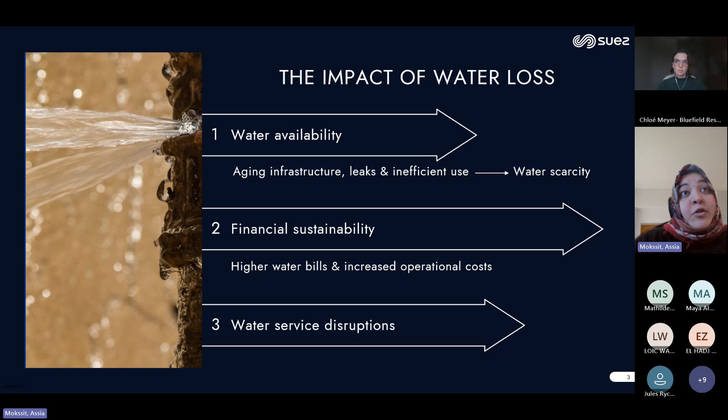So talking about water loss, it's a critical issue that can have significant impacts on water availability and financial sustainability. Excessive water loss, which is often due to aging infrastructure, leaks, and inefficient use, can lead to water scarcity, which impacts consumers. This, in turn, can result in higher water bills, increased operational costs for utilities, and potential water service disruptions. And even further, it can make a network switch to what we call intermittent water supply, which is very hard to come back from once it's established.

And saving only half of this minimal consideration would amount to 200 million more people that could be supplied without draining resources, equivalent to basically 25 times the population of New York. So this is the global idea, but the truth is, when we talk about non-revenue water, this figure entails real physical losses, so real amounts of water that are lost, but also what we call apparent or commercial losses, which are more related to losses in income.

But even though apparent and commercial losses are not directly related to amounts of water, reducing them is crucial to allow the utility to keep its sustainable financial capacities. This means that they would be able to invest in all the actions that are needed to reduce the physical water losses. So when we talk about non-revenue water, we must take into account physical losses as well as apparent losses.

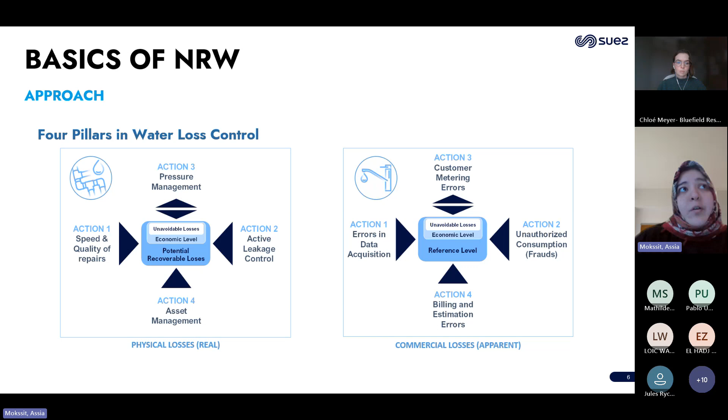This slide shows the global approach that we use in SUEZ, but it's basically the traditional one that everyone uses. There is first an assessment step, allowing for the definition of the optimal combination of actions according to the existing level of efficiency in the system. Then at the bottom half of the slide, we have the actions that are carried out, as we saw them in the previous slide.

These actions cover first leakage management, which entails leakage mapping, detection, and repair to enable a quick response and reduce leakage runtime. We also have pressure solutions, which include advanced pressure control to minimize stress, leak frequency, and leak flow. Then we have asset solutions, allowing to identify weak assets to reduce break or burst frequency and maximize capital expenditures or investments. And finally, there are revenue solutions, which consist in identifying, detecting, and reducing uncontrolled and non-revenue volumes to increase revenue and allow the utility, as we said earlier, to maintain financial stability.

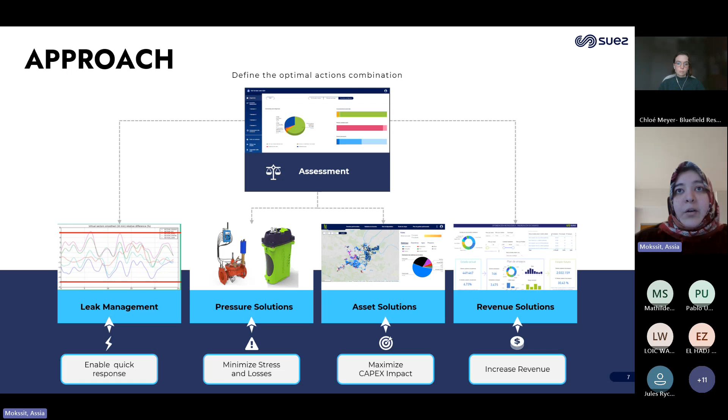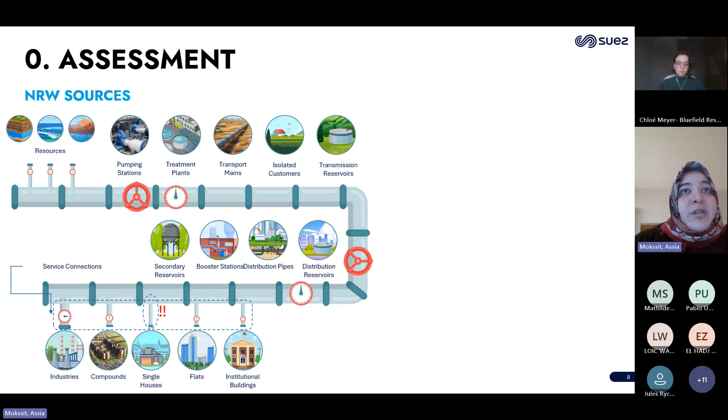So what we will see in the next slides are the details of each of the steps that are related to reducing physical losses. So here, the first thing is the assessment part. And in order to do that, we review this figure, which represents the common elements in a water system to identify the different sources of NRW.

So as you can see, at the production or transport network, we can have metering inaccuracies at the source, leaks or overflows at the reservoir level, or losses on the mains. Then when it comes to the distribution network, we can have overflows or leaks at the tank level, but also leaks on the pipes, the service connections, and the accessories. And finally, at the customer level, we find the main constituents of apparent losses.

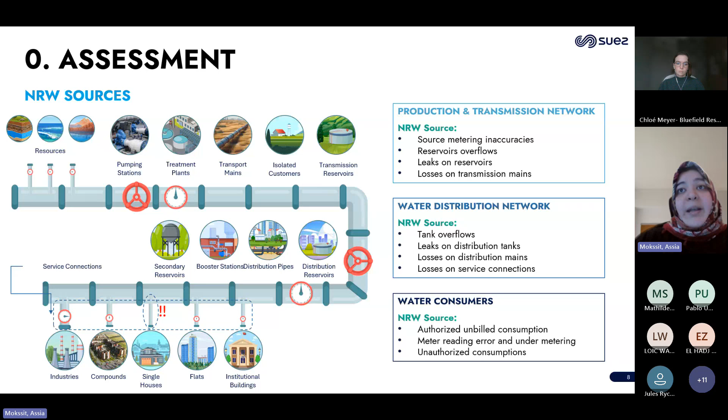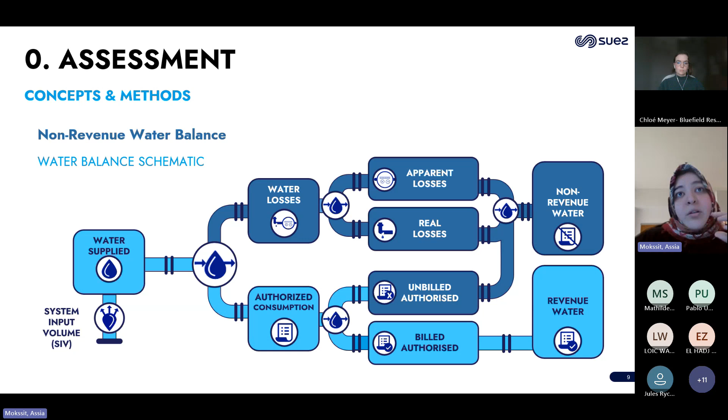So the assessment step here needs to explore each of these potential sources and evaluate the losses related to them, which actually allow us to draw a water balance schematic. So this is what you see here on the slide. Here you can see that the system input volume, so basically what we put in our system in terms of amounts of water, is divided into authorized consumption and water losses. And the NRW encompasses the unbilled authorized part of the authorized consumption as well. So when acting upon reducing NRW, it's the dark blue part, basically, of the figure that we're trying to reduce.

And this figure comes actually from the IWA's water balance, which allows us to detail the components of our system input volume. And this operation is crucial to conduct an assessment and have an idea of the system's current efficiency. And in order to do that, we have three main methodologies. So we can carry out either a top-down analysis, which is an analysis of real and apparent losses based on volumes from production data and consumption.

Then the second one is the bottom-up analysis, which goes from the estimation of physical losses from parameters like the minimum night flow or pressures. And then the third one is called component analysis, and it is based on the estimation of each component, like leaks, pressure data, and meter errors, and it's developed using operational data. And ideally, an assessment would entail using at least two of these methods to complement the data and evaluate the NRW level of the system.

So the assessment actually needs to gather operational, structural, hydraulic, and customer management data to come up with an evaluation of the current NRW level. This can be done using different tools. So the IWA Water Loss Specialist Group has a free tool called EasyCalc. At SUEZ, we use a tool called AquaCircle. But an important thing to keep in mind is the fact that it's not just gathering figures and filling out basically boxes in the tools that needs to be done. This assessment step needs experts going on the field to gather this data firsthand and assess the situation.

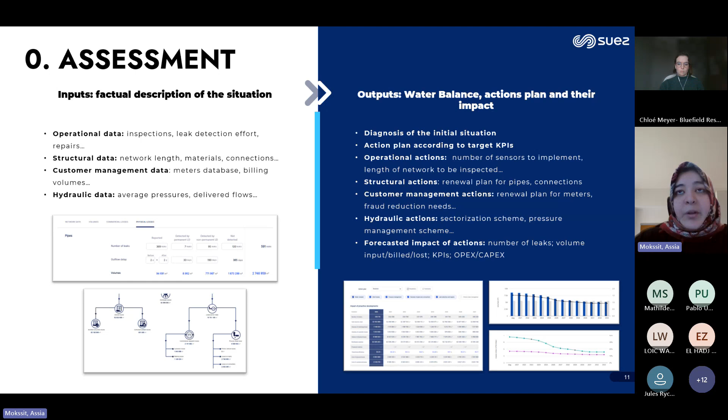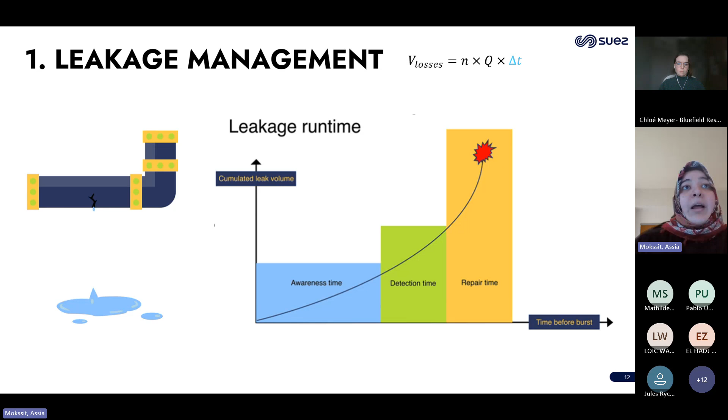And an easy way to look at it, if you look at the top of the slide, it's by dividing the losses volume or quantity into its components. So if you look at the equation, to reduce the volume of losses, we can either reduce the number of leaks, we can reduce the flow of the leakage, or the leakage runtime. And when it comes to leakage management, what we try to do is to reduce the leakage runtime. And this leakage runtime can be divided into an awareness time, a detection time, and a reparation time. And the idea in this step is to try and reduce the three of them.

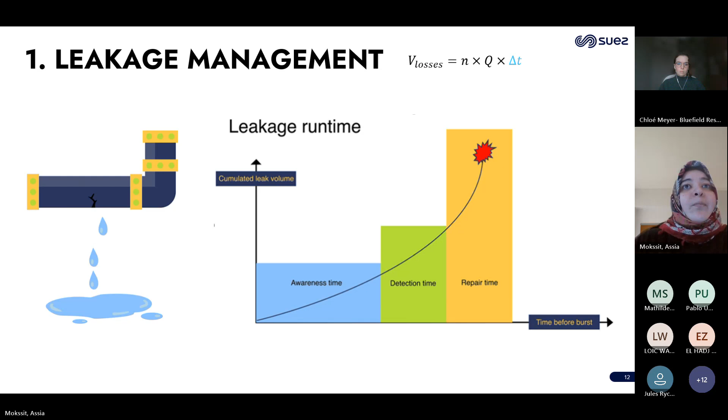So the approach here is to carry out an analysis at the network level based on risk assessments for leakage mapping. And from there, the principle is basically to divide and conquer. So we carry out what we call a sectorization process, or if you are more in an English-speaking country, this is where DMAs or district metered areas come into place. So we have leak pre-location, then a more accurate pinpointing when we go down in scale.

And each step has adapted techniques and technologies going from, for example, satellite image analysis for leak pre-location at the zone mapping level to digital twins for the pre-location and acoustic field techniques or tracer gas for the pinpointing, or even sniffer dogs, if you heard of this.

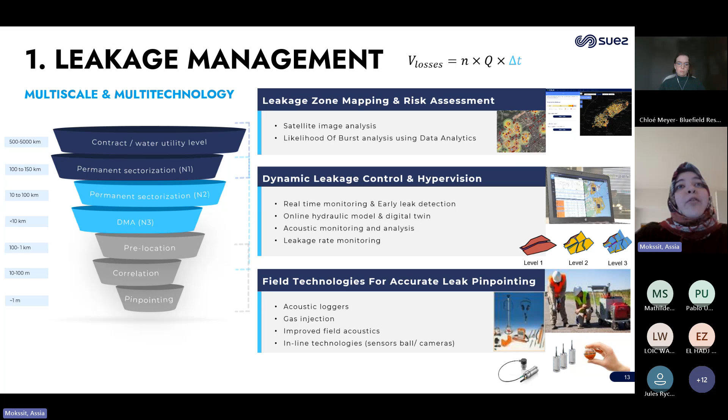Once the leak has been found, all that is left is to repair it. And the repairs should be completed as soon as possible after a leak is detected, as leak runtime, as we saw, affects the volume of physical losses. Another thing to keep in mind is that repair quality also influences whether the repair is sustained or not. So it is essential to consider several key factors to ensure the efficiency of the repairs.

This includes the efficient organization of repair procedures, along with the availability of appropriate equipment and materials. Ensuring adequate funding is also critical to maintaining operations, and adherence to standards for materials and workforce guarantees quality and durability of repairs. The implemented strategy or policy should also emphasize having well-trained staff and committed management teams. And finally, maintaining a high quality of service connections ensures reliable and consistent water distribution. So this is basically it for leakage management.

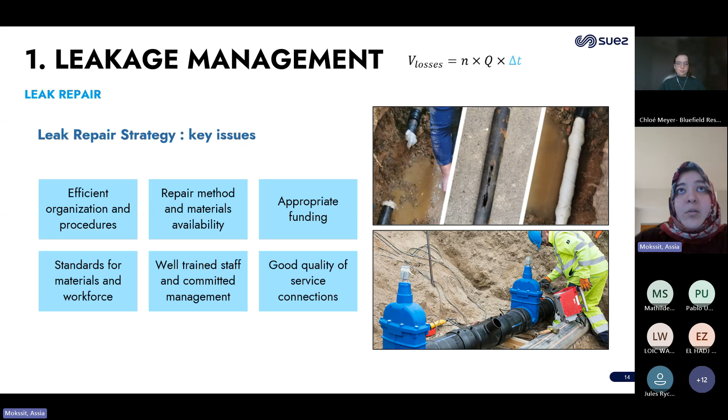Now we'll go to the second action, which is pressure management. When it comes to pressure management, we have two things. There is traditional pressure reduction or advanced pressure modulation, where the principle is very simple. By controlling the pressure of the water, we will be reducing the volume of water which is being forced out of the pipes through the leaks. So here we reduce the leak flow, and the correlation is rather straightforward. It's a square root relationship between velocity of the water coming out of the leaks and pressure. So this is for the reduction or modulation techniques.

The second action is related to pressure transient management. And here, it's more something related to asset management, because transients or high pressure fluctuations are a stress element for the network. So by controlling them, we reduce the number of leaks. And this is what we are displaying in this slide. This requires going through three main steps that you see here.

The first one being gathering the transient data using high-frequency pressure loggers in order to detect the transient events. Once these events are detected, the second step is to identify the sources of the transients and devise mitigation solutions. And finally, a third step is sustaining the quote-unquote calmness of the network that was achieved.

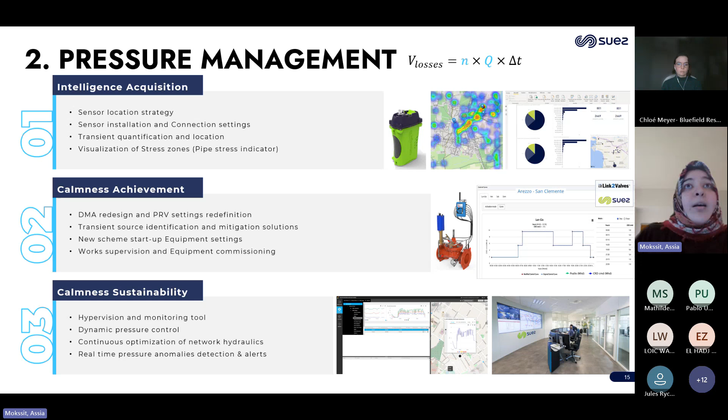And here we go to asset management. This is an action which allows us to reduce the number of leaks on the network. It basically consists in devising an efficient network renewal strategy. The idea here is to detect the pipes or network components that are the most degraded to replace them. In order to identify these pipes, inspection plans can be carried out. And here you will have a lot of technological possibilities that exist in the market. We can go from acoustic, electromagnetic, ultrasonic, or even transient techniques, and more lately, inspections even by drone or using fiber optics.

But the difficult part here is choosing which pipes to inspect, because it's normally a costly endeavor. So we need to pick the right pipes to inspect, and after that, how to extrapolate the information from what was inspected to the entirety of the network. At this stage, we can use clustering and extrapolation algorithms. Once this is done, here comes the asset degradation model. We will need a degradation model to be built to establish aging scenarios and forecasts, to try to forecast the risk evolution upon which the renewal plan will be established. Here as well, different models can be used, going from simple multi-criteria analysis to statistical or AI-based models.

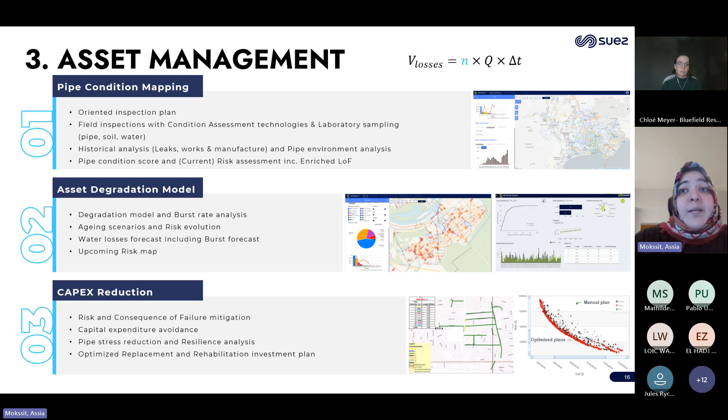And finally, because the renewal is an important investment line, optimizing this investment plan is the last step for an effective asset management strategy. So here we basically went over the main actions for physical water loss reduction. In the following slides, we will see some use cases where they were implemented and the obtained results.

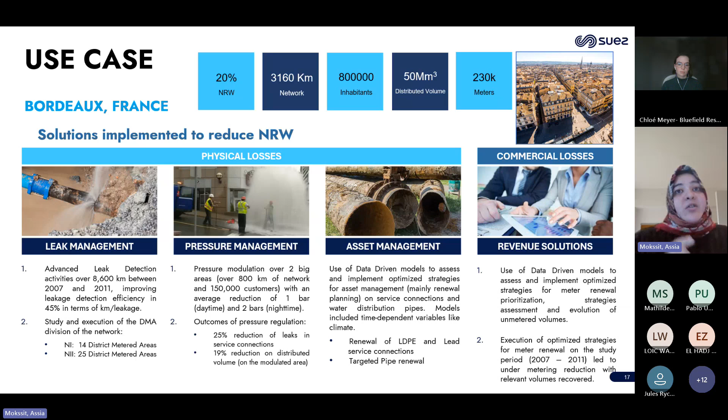The first use case was in Bordeaux, here in France, where the 3,000-kilometer network was taken over by SUEZ in 2006, with an initial NRW level of 20% and an objective of reducing this NRW level. An initial water loss assessment was carried out, and then the actions that were devised were deployed. These actions consisted in implementing advanced leak detection activities and network sectorization, as well as implementing pressure modulation over 2 zones, covering 30% of the network, which gave impressive results. The third action was devising an optimized pipe and targeted service connection renewal plan. And finally, implementing a meter renewal plan. It's also worth mentioning that these actions were all accompanied by real-time monitoring throughout the whole process.

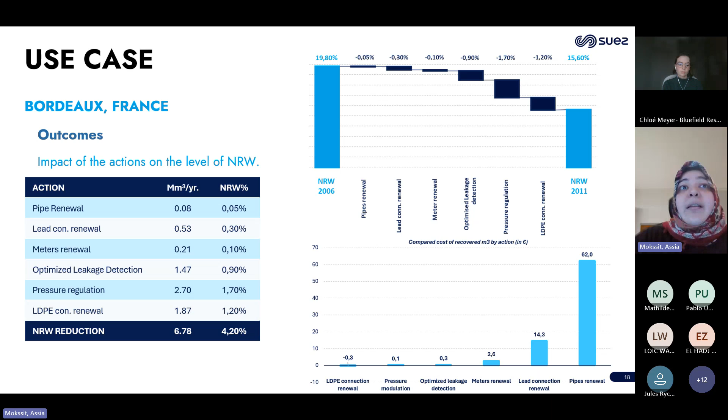So here we go. This is a slide of the outcomes. So the NRW levels were reduced by 4.2% over the period. But the interesting thing is that the results obtained from each of the implemented actions at the NRW level were quantified. And as you can see here, we have pressure modulation, which is a pretty efficient action that was implemented.

The second case study or use case is that of Arezzo in Italy, which is a semi-rural network with very low capex. The focus here was on new installations in order to expand the network and create new production plants. So there was nothing or barely nothing left for the network renewal. And also another thing which is important is that the NRW initial level was of more than 40%, to which we will add the fact that this was a region with very high water stress.

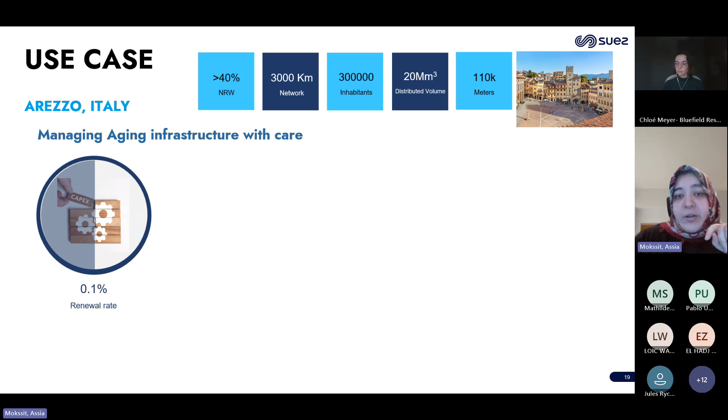So here, because as I was saying, we had an investment constraint, the network renewal rate was very low. So the focus needed to be on the other actions. In terms of leakage management, what we had is a very fine-grained sectorization that was implemented, going from 5 DMAs basically at the beginning to more than 150 DMAs at the end. And a comprehensive pressure management strategy was carried out.

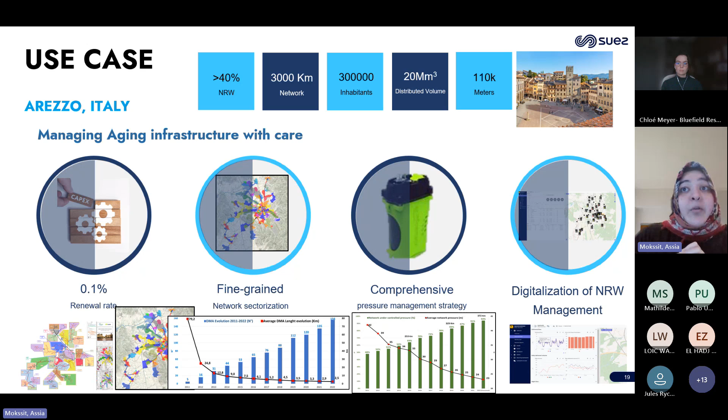And similarly, in this graph here, what we see is that by 2022, more than 90% of the network was under pressure control. And finally, similarly to Bordeaux, the NRW management as a whole was digitized.

The figure here on the left is not really an outcome, but I really like this figure, and I didn't really have enough space on the previous slide to put it there. It's a nice figure because it showcases the progressive reduction of pressure with an increasingly sophisticated modulation and the outcomes from there. So in 10 years, the average pressure went from 42 to 23 meters,

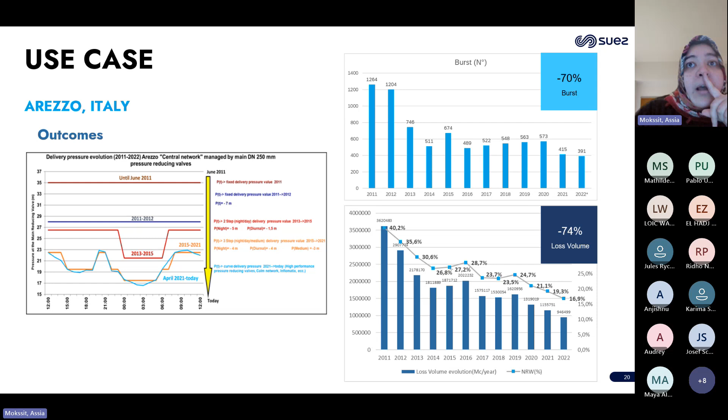and the performance indicators of our SUEZ network as a whole were improved, with basically an important reduction in the pipe burst rate over this period. So 70% fewer leaks in the network and more than 70% reduction in the volumes of leaks. The NRW, if you can see on the figure, was at 17% or 16.9% in 2022.

And this is my conclusion. If I had to say something, it is that with aging infrastructure, urgent investment in water networks is essential, even if it's not always a political priority. So reducing NRW requires a collective commitment, culture change, and strategic investments. This is to say that addressing NRW isn't just about fixing leaks.

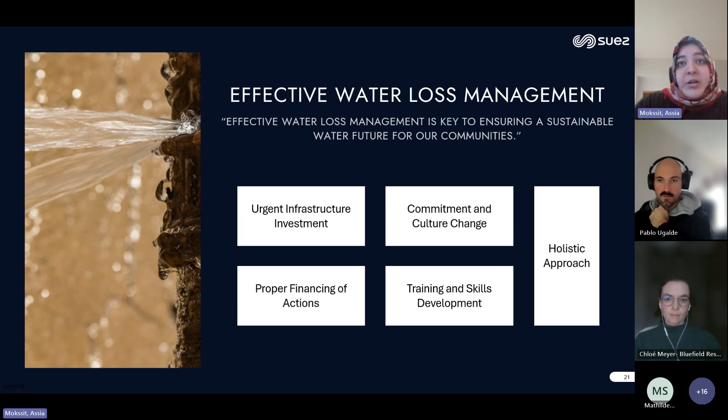It demands a holistic approach that involves collaboration across all departments, from management and finance to operations and customer service. Within these departments, we also have HR, and empowering human resources to provide the necessary training and skills development ensures teams are equipped to implement effective NRW strategies. So if I had to sum up, I'd say that only through cohesive action and strong commitment can we make meaningful progress in preserving our water resources.

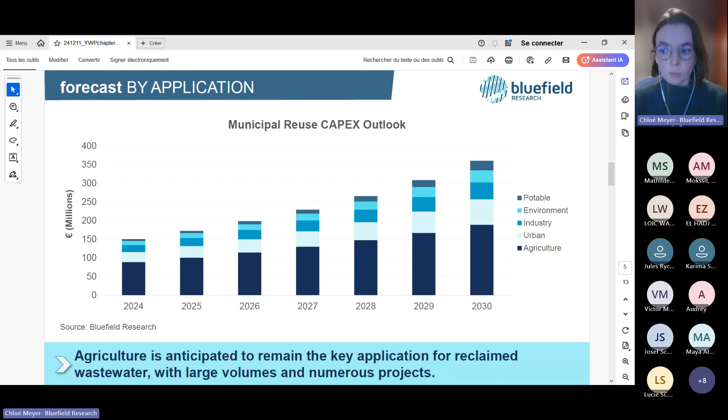Now, if we look at the business models for municipal reuse projects and the different opportunities they offer, we see that we've identified 5 end-use applications. So we have industrial applications, agricultural ones, urban, potable, and environmental applications as well. Essentially, what we did here is that we looked at the demand profile of each offtake type and how it impacts the overall business case or opportunity, because each type varies pretty significantly in their needs, from water quality, volume, seasonal demand, all the way down to the overall willingness of the end users to pay for reclaimed water.

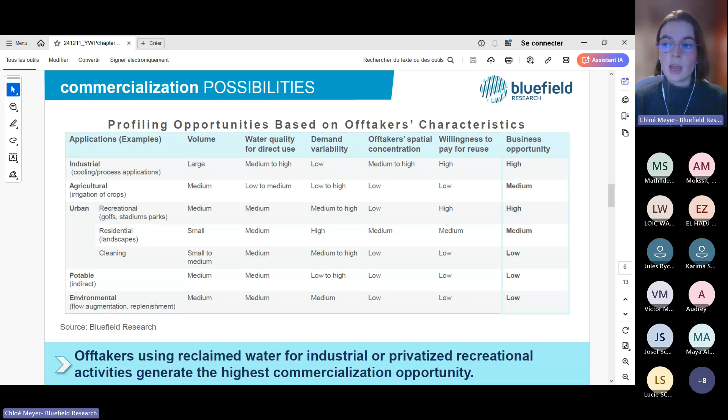And our conclusion here, or the big takeaway, if I can say, is that off-takers that are using reclaimed water for industrial or recreational activities are the ones that can generate the highest commercialization opportunity based on an optimum combination of characteristics. But at the same time, a low commercialization opportunity can still lead to a very strong regional value proposition and creation.

Another elemental consideration of reuse projects is trying to find the balance between inherently competing objectives. By this, I mean that a sustainable rate to encourage the use of reclaimed water often conflicts with the ideal rate to manage water demand, as well as with the required rate to ensure cost recovery or even generate profits. This is where non-economic value creation really comes into play.

Non-economic value creation encourages taking a system-wide approach or system-wide perspective at reuse and looking at the benefits that it brings to the local or regional area. It relies oftentimes on voluntarily setting a lower rate for reclaimed water and subsidizing it with revenue from domestic customers via taxes and fees, for instance. And this is exactly the approach that Singapore takes with its water conservation tax that applies to drinking water and wastewater customers.

Another consideration is that of the portfolio balance. We saw earlier that different off-takers have different volumetric, quality, and seasonal demand requirements, and this can have implications on the overall risk balance portfolio of the scheme. As the share of reclaimed water supplied to a single off-taker increases, the commercial risk increases too, because revenue is then concentrated within a few off-takers, and there's less room to adapt in case of wastewater input shortage.

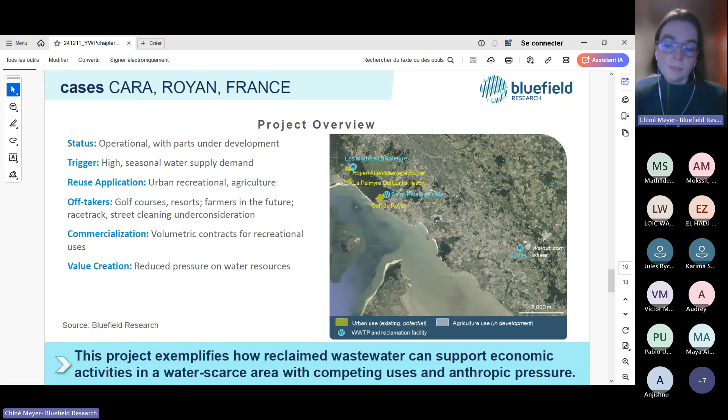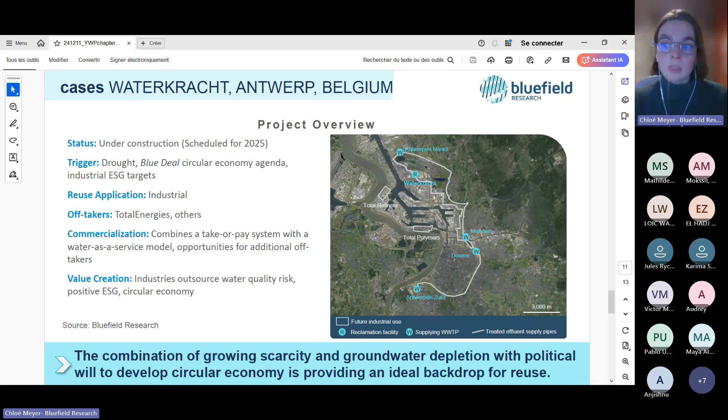So obviously there's much more nuance to all of this, but at a high level, I think those 3 case studies sort of demonstrate how utilities weight the underlying commercialization considerations differently and ultimately land on a business model and value proposition that best aligns with the local context.

I think I'm running a bit up against the clock, but I sort of wanted to conclude today's presentation with some key takeaways on the factors coming into play in reuse projects. I think the key conclusion is that unfortunately there's no one size fits all when it comes to reuse projects. There's lots of different elements to take into account, different ways to combine those drivers, whether it is the policy framework, the local context, what are the profiles of potential customers, what are their activities.

Are there more irrigators with lands to irrigate, with crops to irrigate? Is it more a mix of urban applications with landscaped areas to irrigate, golf courses, more of a leisure activity? Is it more of a potential offtake with industrial customers? So taking all of those elements into account, and of course also the technical feasibility of the project, leads to the fact that every reuse project is extremely custom and unique in its own way.

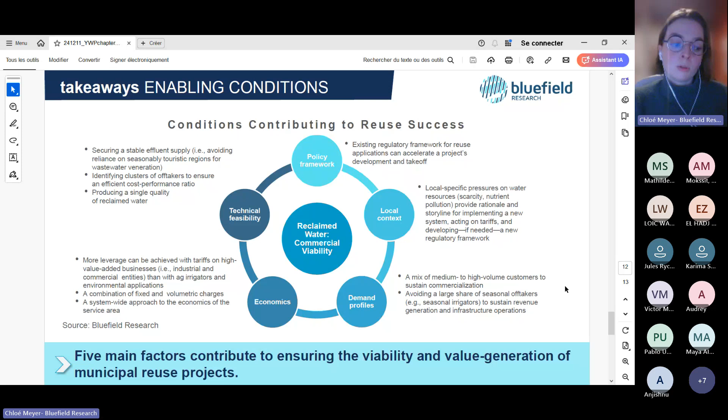I think the value proposition of the utilities can take numerous forms, building on those constraints in terms of space and territory that the project is being developed in. So lots of opportunities and lots of ways as well to shape municipal wastewater reuse and create opportunities. And that's it for me for today.